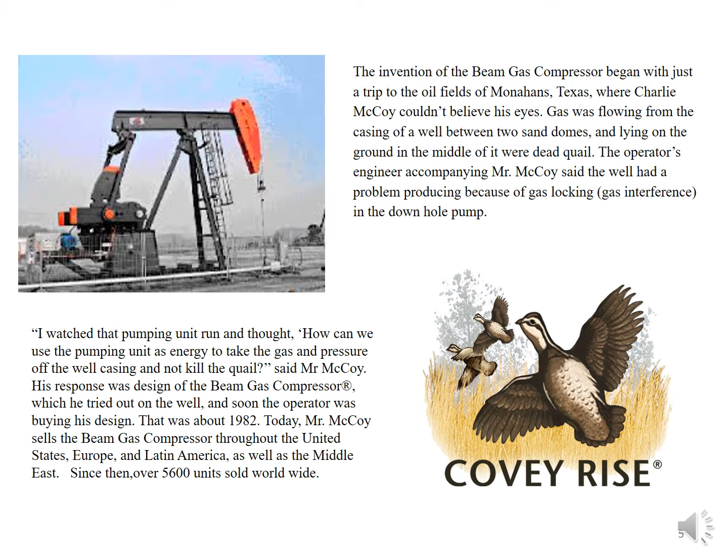But unfortunately for this covey of quail, they happened to be running past at the same time he blew it down, and killed the birds. My boss at that time, and still to this day, is a big birder. So from a conservation standpoint, he wanted to know: how can I blow down that well in an environmentally friendly way and not kill the quail?

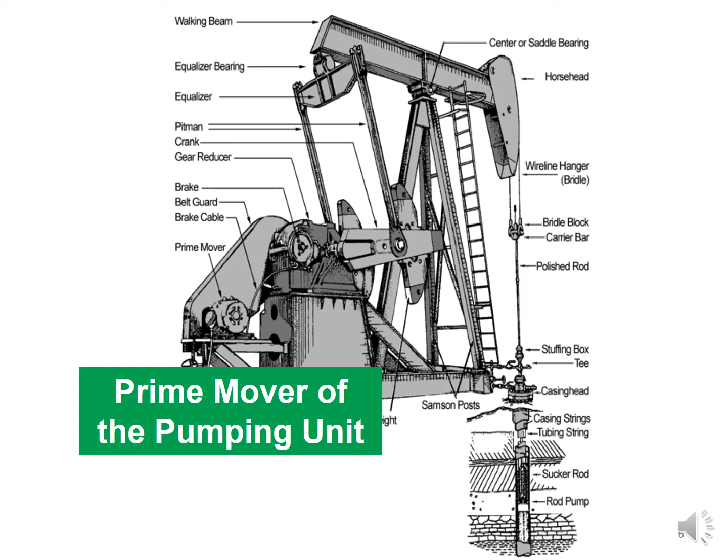That's how he came up with the HyBGC compressor, which has been our main product, because he saw that he had this big pumping unit that just goes up and down and hardly needs service, and just operates and runs. He figured out that he could put a cylinder inside of that structure. How many of you have ever heard of Arm & Hammer?

Arm & Hammer for decades had one product. Then all of a sudden somebody accidentally left it in the refrigerator, and now they had two products. And that's just how it emerged.

In the 80s, you could not find a brand new pumping unit, because there was an oil rush going on, and there weren't enough pumping units, because Lufkin was pretty much the only choice. So if you had a 640 pumping unit on a well making 5 or 6 barrels a day, and you just drilled a well over here that needed a pumping unit for 50 or 60 barrels a day, you were screwed. So what Charlie did was create a pneumatic lift system where he simply put a cylinder over the top of the wellhead, added a piston rod onto your rod string, and then stroked that rod pneumatically. That allowed the operator to take that 640 pumping unit and put it somewhere else.

So he already had the basic idea that if he just took that pneumatic cylinder and put it inside the structure of the pumping unit, now the pumping unit can give him all the action as it's pulling this piston up and down. And these systems are all over the world.

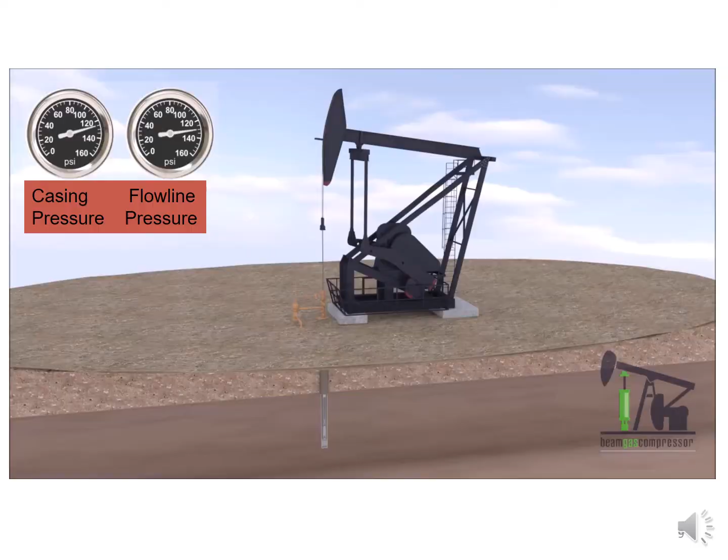This is an example of how we work. We're all about, once again, pressure. Bottom hole pressure is made up of what? Casing pressure and your hydrostatic head. So to lower bottom hole pressure, the simplest thing to do is get rid of the casing pressure. And that's what we do with our systems.

So if you had a typical vertical or horizontal well, the main thing you want is as much fluid in your pump as possible. But what causes you problems? Gas pressure.

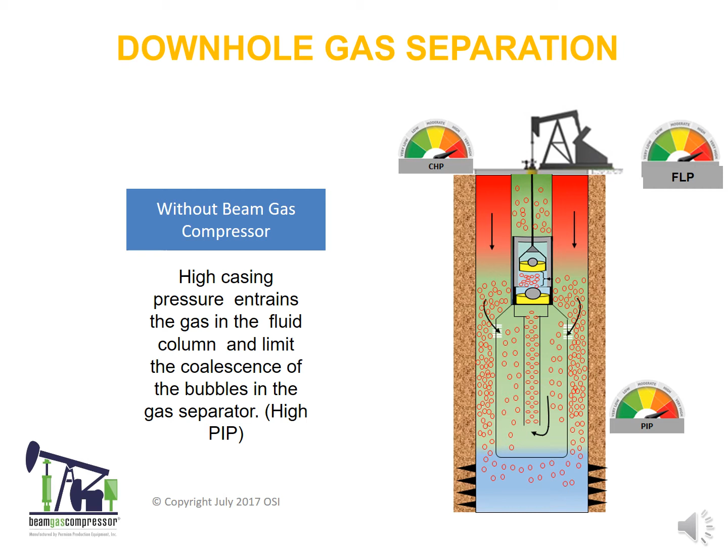Either the gas, because you have high casing pressure, will go into the pump, or it'll just be in the place where you don't want it to be, and it affects your operation. But if you go and get rid of that casing pressure by installing a beam gas compressor, you can drop your suction pressure and discharge into the flow line as you were before.

But now you're giving the casing gas a different place to go because you've taken it off the well. Now the gas is going to go up the annulus, and as the gas goes up the annulus, I don't think any of you have ever opened a beer.

When you take that bottle of beer and take the top off, instantly foam is created. As the gas bubbles go through the fluid, they create foam. But if you just let that bottle sit there, gas bubbles will continually go through the fluid, and it lets that fluid be less dense. Because if you just had the bottle with the cap on, the density of that fluid is much more than with the cap off.

Same thing for an oil well. So if you're trying to lower bottom hole pressure by getting rid of casing pressure, you also create less dense fluid. Most horizontal wells you normally run with 1,500 to 2,000 feet of fluid over the pump because you can't pump it down, the gas goes in your pump, unless you go get an Odessa separator, a HEAL system, or a Predator or something to try to keep the gas from going into the pump.

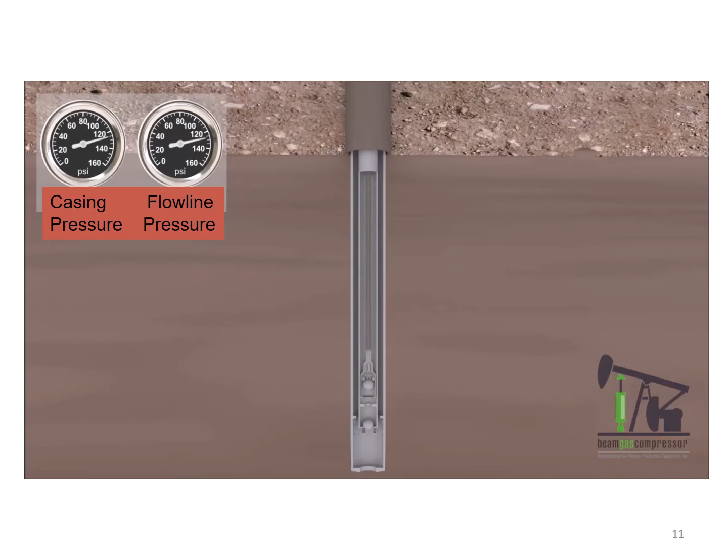What we suggest is let's get rid of the casing pressure first before you go and do something downhole, because it's a whole lot cheaper to work on something on the surface. A lot of people already have a Mother Hubbard below the pump. If we take the casing pressure off, we're going to give you more fluid because we're giving you a lower bottom hole pressure.

Now, the only problem you run into with horizontal wells - we did this for Oxy 5 years ago. We put 3 compressors on some wells they had in Carlsbad, and at that time they were running 90-foot tailpipes. All we did was make their gas interference worse, because once we took the casing pressure off, the gas wants to move faster to the wellbore, to the vertical side.

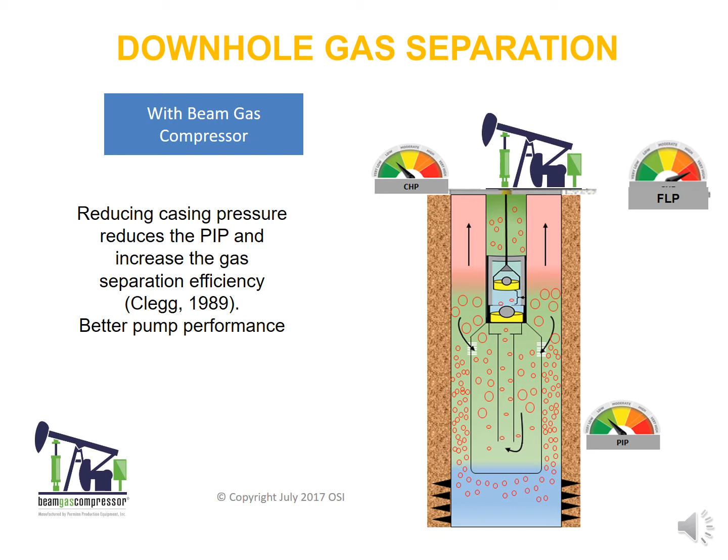And when that pumping unit stroked up, it just created a greater differential and maybe just sucked more gas up that tailpipe. I'm sure you've all heard of water getting sucked up the tailpipe - same thing happens with gas when it goes up that way. And this is the reason.

What we get into with gas and fluid is this - these are your gas bubbles when they're entrained in the fluid. They're small. But as soon as we lower the casing pressure above it, we're going to make those bubbles get larger and they're going to move at a faster velocity.

One of the big deals with horizontal wells used to be up in the Bakken was that they'd foam - they'd produce fluid up the backside. Well, I can take a well that's got 600 pounds of bottom hole pressure, and as soon as I take the casing pressure off of it, it's going to foam. Because even if it's 7,000 to 8,000 feet deep, when I take that gas off there, I'm going to push that fluid to the surface, and it's going to come right up along the casing in the annulus.

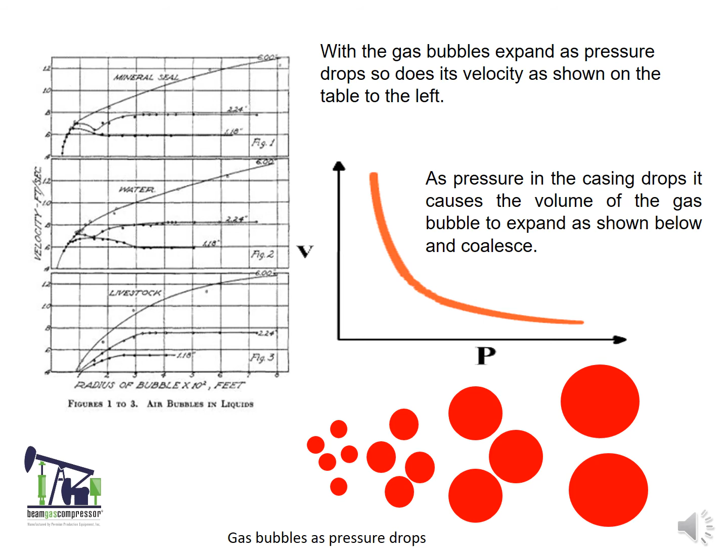And my compressor doesn't really like that, because our beam gas compressors were designed to have relatively dry gas. We can have high BTU gas, but if you send me a slug of fluid, I'm not going to like that. On a horizontal well, you already have a tendency to foam because you have this long corridor of fluid and gas constantly going through it. It just keeps getting agitated.

That's all that's going on. It's not really because the fluid wants to foam, it's just because you've got so much of it and gas rushing through it, so it's going to foam. So when we take the casing pressure off, we're going to make that even worse unless we figure out how to stop that.

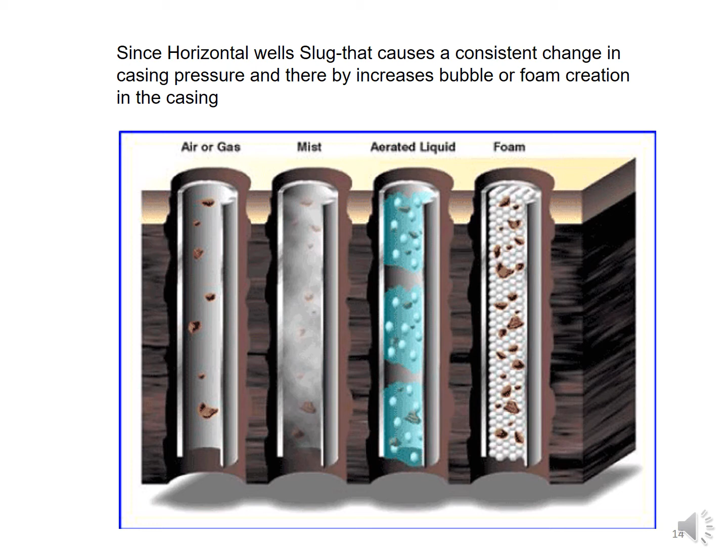So this is a well for EOG up in North Dakota. They had a horizontal well making about 150 MCF of gas. So what they did was hook the beam gas compressor to discharge the gas back in on this side. The operator took this video, but he started backwards and started at the back end.

And then we get over here - here's the line going up to the beam gas compressor. They're non-lubricated, so pretty much they just sit there and run. There's not a whole lot to mess with on them. And then you come down here, here's the suction side. That's my boss there standing in the way of the filming.

And so here's the suction line where we suck the gas off of that line. Because it's a horizontal well and they had 750, 800 pounds of bottom hole pressure, we had them put a vessel over here on the side so it would capture any fluid that came up. The cost for us doing this is about $25,000. And the vessel, they just have one out in their yard.

So here, we can lower casing pressure very well on a horizontal well as long as we got some way to keep the fluid from when it comes to surface so we can stop it. But that gets to be problematic. And the reason why it sort of gets problematic is Chevron has a steam flood that they operate out in Bakersfield, about 6 years ago. Is everybody familiar how a steam flood works?

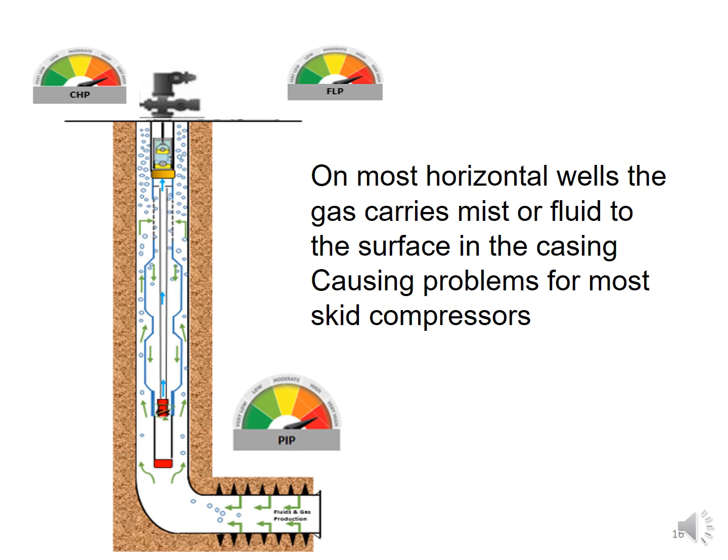So what we started looking at, okay, now here you have a horizontal well. This has an Odessa separator in it. And this is, they've got casing pressure, they got flow line pressure, they got bottom hole pressure, their pump intake pressure. But as soon as we take that pressure off, we're going to make everything work better because we get more pumping pressure, but we also start slugging that well a little bit more.

So what we designed was a hydraulic system to go on top of the wellhead instead of going on the pumping unit. And the hydraulic system, and you'll see here later, is really slick because we don't care if I get straight fluid, straight gas, or a mixture, because I can move it. Typically all I'm trying to do is move it from off the annulus and back into the wellhead so that this horizontal well can continue to produce.

Now, we talked about pressure. How many of you guys run ESPs? What's the worst thing in the world to happen with an ESP? Casing pressure go from 100 pounds to 200 pounds, 100 pounds to 20 pounds. They don't like that.

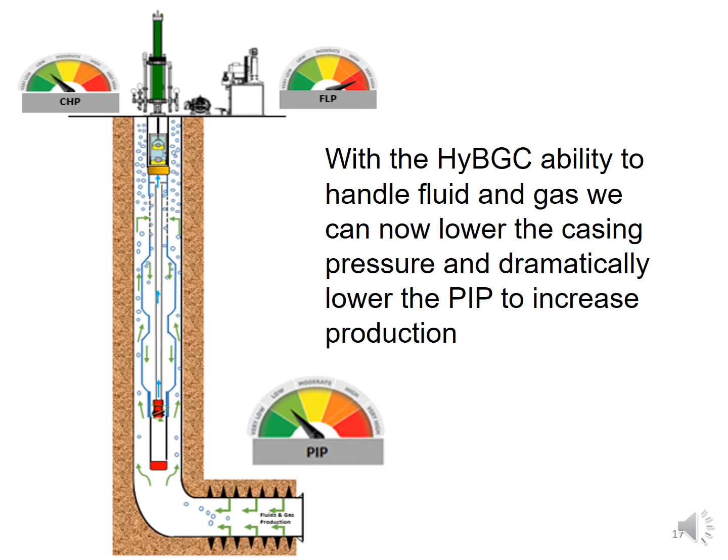Most wells don't. And if you put a typical skid compressor on the surface on an ESP and you pull the backside on, you're going to do real well for a period of time until the scrubber tank fills up. And then that scrubber tank, once it fills up, it's going to do something. If it's through automation, it might have to pump all that fluid out, but more often than not, it shuts down. And when it shuts down, your casing pressure goes back up. So that's really not a good thing to your ESP or your downhole equipment.

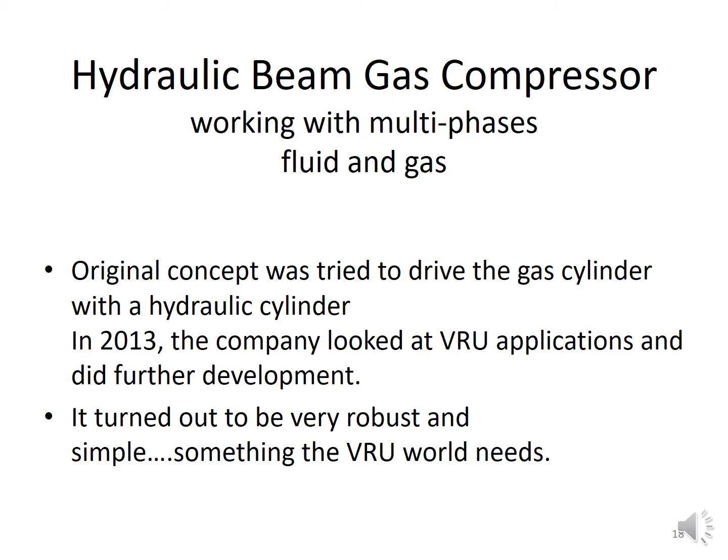So what we started doing actually about 15 years ago was developing a method that we could drive our beam compressor that's been around for 40 years with a system that's been around for 100 years. This hydraulics has been around forever.

The one thing you don't see in here is the mechanic that comes along with this. The statistic I've always heard is that when you run these types of things, you need one mechanic for about every 6 or 7 units, because they're constantly having problems and fouling, and they normally run anywhere from 94 to 96% of the year. For the last 6 years that we've been operating our system, we've been running at 99.9%. The only time we're ever down is when the automation messes up, more often than not.

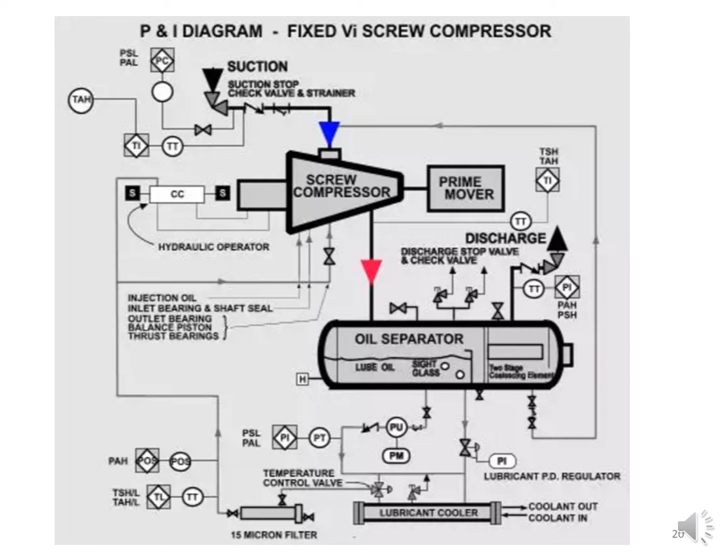This is the difference - these are all the different things we don't have to have compared to our competitor. The thing I think the most about this is that we're very simple. I like to consider myself simple-minded, and simple is a whole lot easier. With this type of system, you don't need one mechanic for every 6 units. You can have one mechanic for hundreds, because the amount of problems you're going to have are yearly, not weekly or month by month.

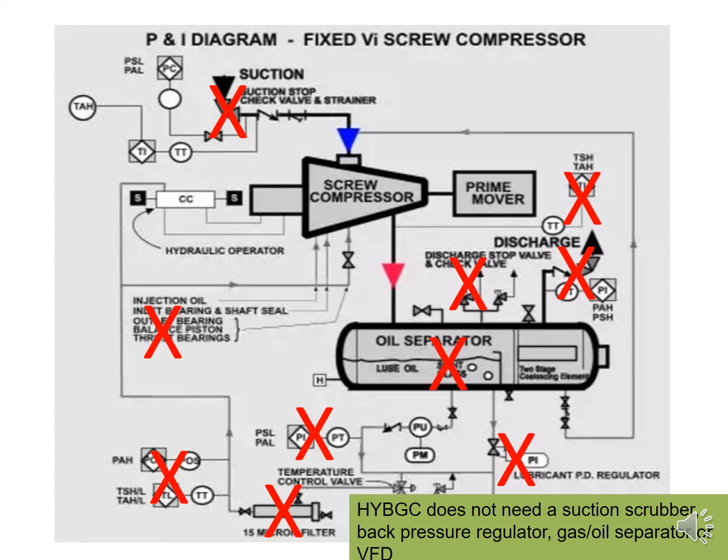Because if I see gas and fluid come into the bottom here and my piston's trying to go down, my system just reads that as hydraulic pressure. We just push until we get whatever maximum number we want, and then we change direction. So we might short stroke for a period of time until we push all the fluid out. We might raise the casing pressure - instead of it being at 5, it might go to 7 or 10 until we get all the fluid out. But we don't have to worry about it.

One of the big applications for horizontal wells - I don't think I've seen it too much in the Permian - is allocation separators. When you have 6, 7, 8, 10 well pads, normally the Railroad Commission likes to know how much each well is making. So the solution has normally been that you take this big allocation separator, set it on your big pad, and drive all your fluid into there so you can measure everything going to that allocation separator. Then the allocation separator has to build pressure to send that fluid to a battery.

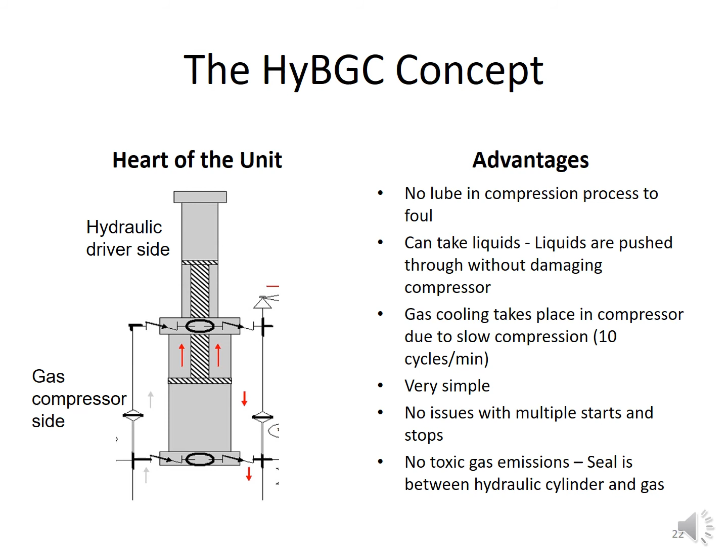As soon as you build pressure in that allocation separator, what are you doing to all your well bores? You're building pressure. So by putting my system on the outside of that allocation separator, I can lower the pressure in the allocation separator to 15 pounds, whatever it takes to dump, and I can lower the pressure to all of the wells in the pad. Then I can compress the gas back in the flow line and use that to push back up to 200 or 250 pounds to push all the fluid to where you're trying to get it to. With one simple thing, I can increase production on a large number of wells.

So this is what happens - how many are familiar with hydraulics? Hydraulics, you see it all the time on the garbage truck. You see all these devices that have these rams and stuff, and they just work. There's just not much to them.

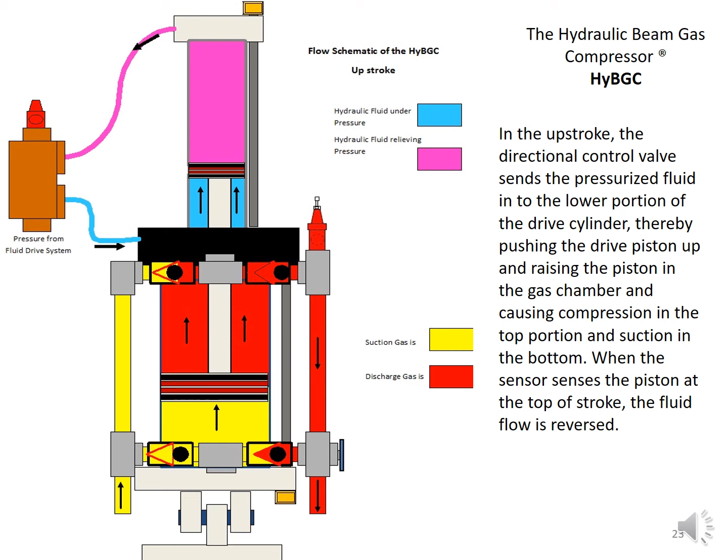The heart of it is the directional valve, which is basically a valve that either goes this way or it goes this way. If it goes this way, it's sending fluid to the bottom of my device. If it goes this way, it's sending fluid to the top of my device. So depending on which way it's going, that determines which way this is going. Right now it's going up.

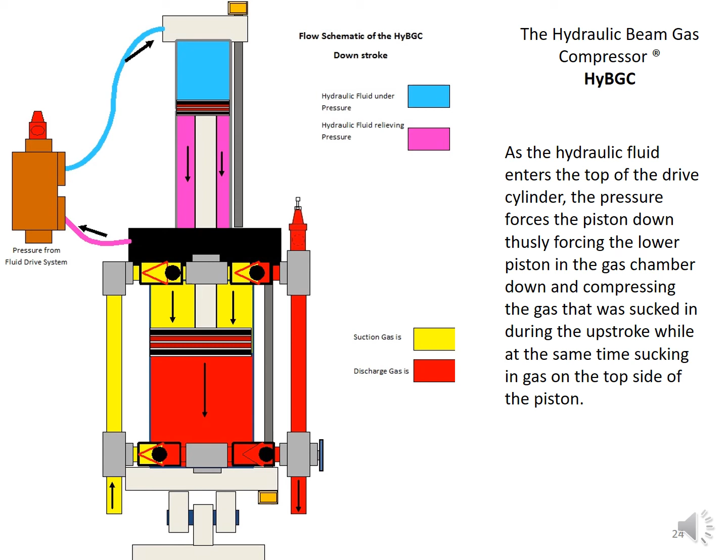And now it's going down. That's the action of the system. There's really nothing more complicated than what I've just shown you. It has 4 check valves. It has a pressure release valve on it.

But one of the interesting things about it is we're dual acting, just like our beam gas compressors were. We compress up and down. But if we get fluid in it, what happens?

All we do is just keep on running. So we're sucking straight fluid. We've had customers buy them, like in Alaska, just to move fluid off of a Rotaflex. It's not going to bother our system because we design it to run with the fluid. We don't need to scrub it out. We don't need to have dry gas going into the compressor. None of that's worrisome to us.

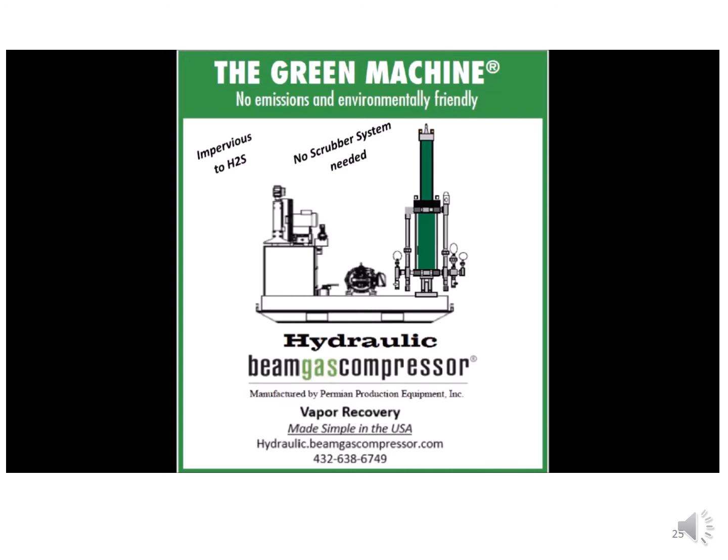So typically our beam gas or hydraulic compressors will have a suction side, and we'll put a pressure gauge, pressure transmitter on this side, and discharge transmitter, temperature, and this is the guy that controls what we do.

Because inside the structure of the hydraulic system, we have a proportional valve, that directional valve I showed you. How much the valve goes left or right depends on the suction pressure, how fast I want it to go. You guys are typically used to variable frequency drives, but most people don't like VFDs because they're a pain in the ass. They're very persnickety.

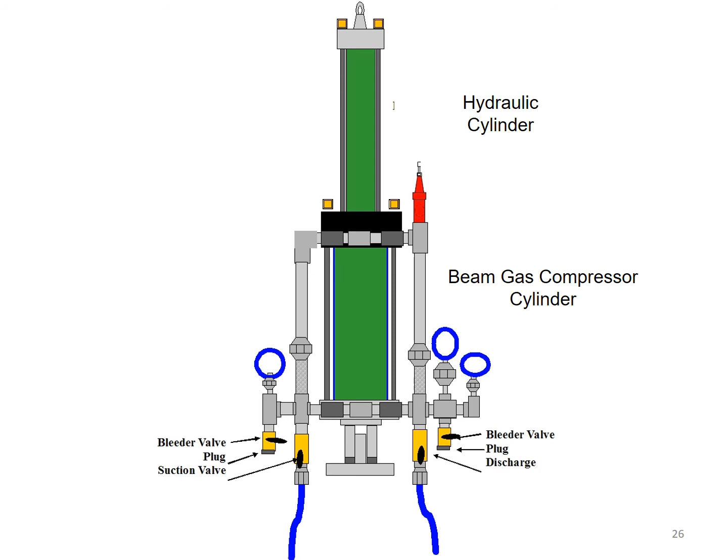Well, here we can take a proportional valve, and depending on whatever kind of programming you have, we tell that valve — it's a 4 to 20 milliamp signal. Depending on how far you want it open, that tells the valve how much fluid to send to the system. Sends more fluid, I go up and down faster. If I don't need to go that fast, it sends less fluid and I just go slower. But I don't require anything super special like a VFD to accomplish that.

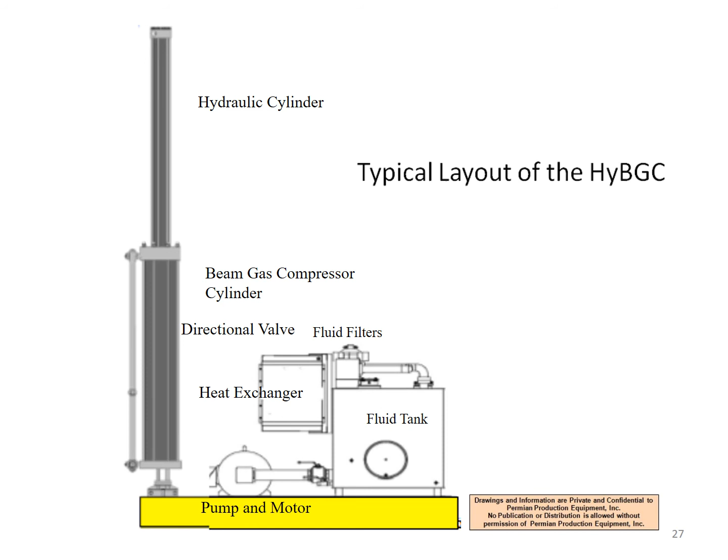The control system for this is whatever you want to put on. We do not provide you a control system because you already have people trained for that or used to that. We can use a Lufkin SAM unit, or whatever they call it nowadays, Well control, Allen Bradley — like anything that can give me 5 analog ports that I can plug a transmitter to, and I can tell a motor to come on. We've done it with Murphy switches. It's just to make it really, really simple.

Since then, they figured out that on their batteries, they normally already have a system they can just add another card to, the system that's already running all their other stuff, and we can piggyback on top of that. We don't have to have a separate system.

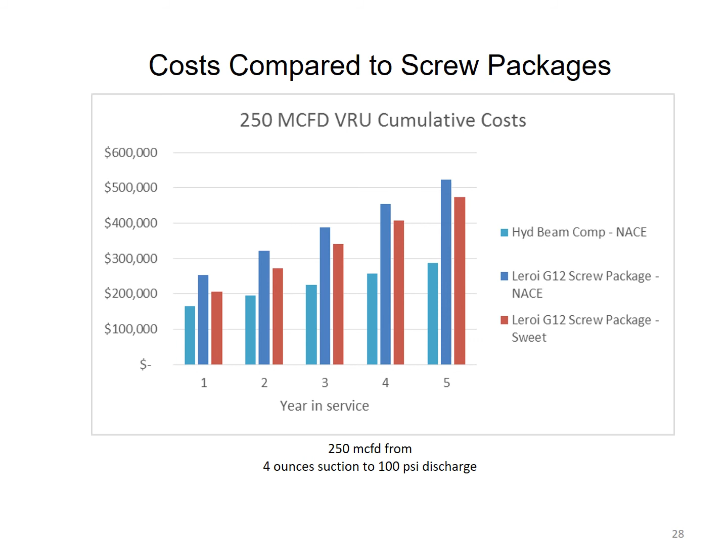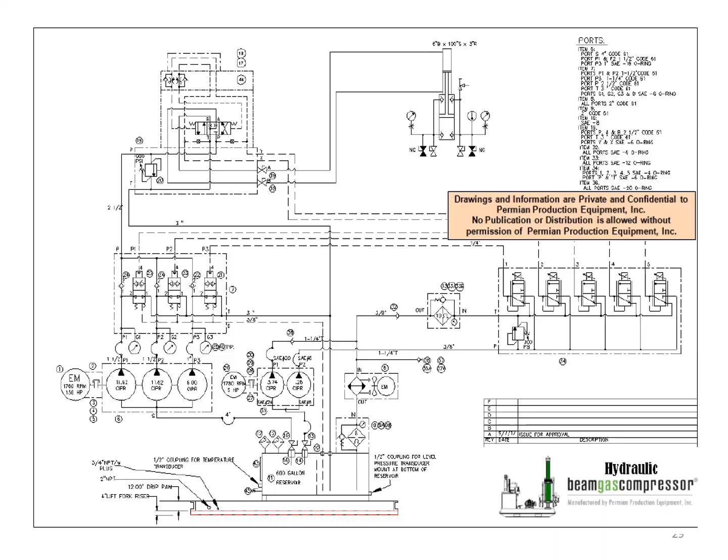Fluid goes over here, these are the proportional valves. Fluid goes here into this and tells how much fluid, and comes to our compressor and comes back. But if you looked at a P&ID for a screw compressor doing the same thing, I don't think you could fit it on one page — I think it'd be multiple pages. So there's a bunch of different advantages to our system. I like no VFD.

All of our systems are basically H2S compliant, regardless of what you're looking at. You know, NACE compliance to us, we're really already there. There's nothing that we change to get to be NACE compliant. Everything's stainless steel already, 3,000 pounds, so there's nothing we really have to change that's wetted by gas that has to be NACE. Whereas other compressors, they have a lot of components that they have to change out.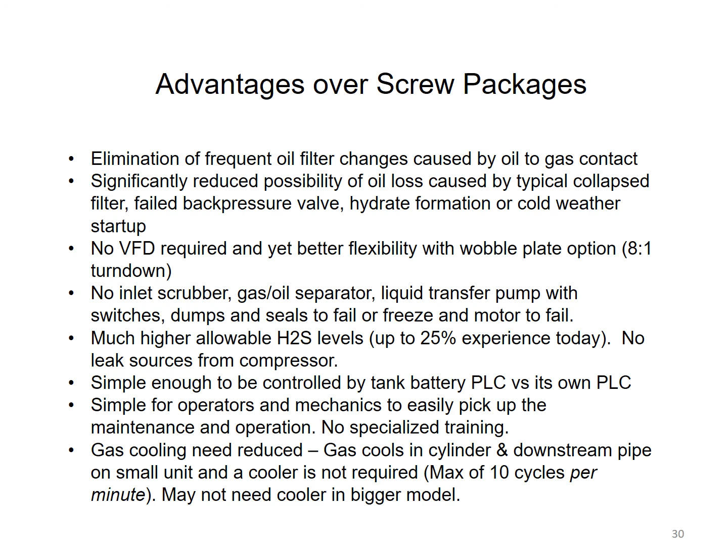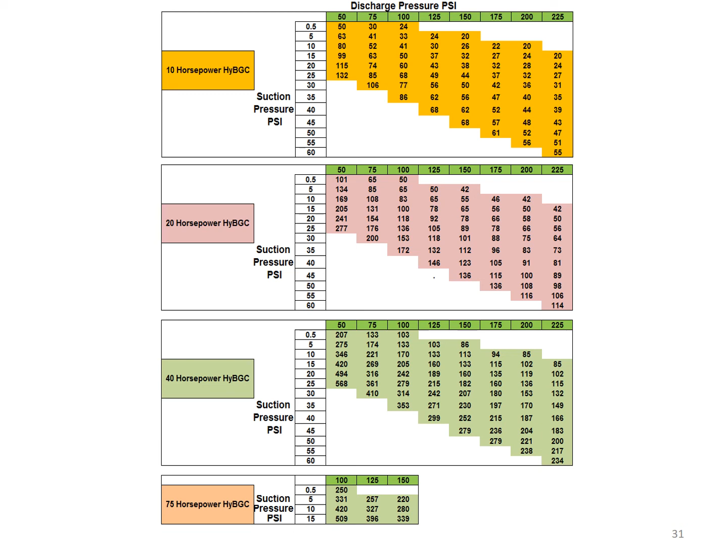These are typical pressures. We can run them with a 10 horsepower motor, 20, 40, 75. We've got ones in the yard now at 150, 200 horsepower. We can do pretty much anything that you ever need. What we're looking for is what kind of discharge pressure am I pushing into, and how low do you want me to go on the suction side in gas, and then I can tell you how big of a motor I need and how much fluid I need to drive. It's a fairly simple concept.

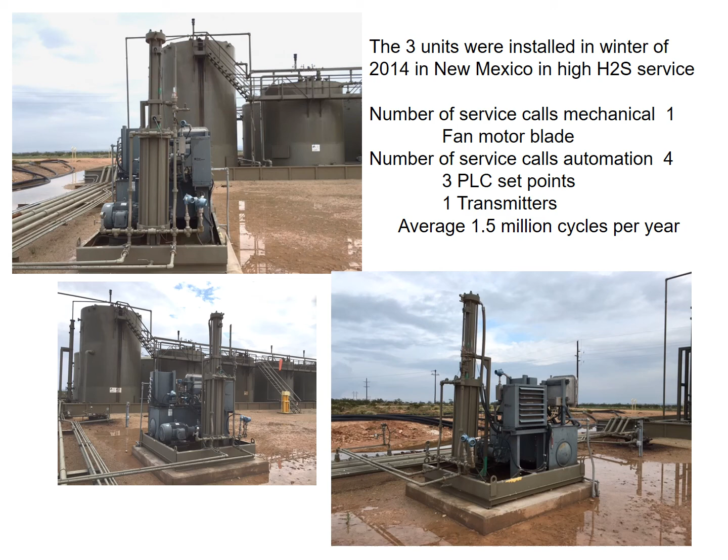These are some different wells that we've got it on. It rained in New Mexico this day, last year I guess sometime. It's just a vapor recovery unit, they just plumb it in and it just sort of sits there. Now this operator, this is the Allen Bradley panel that they have put on there, but they don't put it on there anymore, because when they were first doing this, they put it on the skid, and they had to have a Div 1 explosion-proof panel and stuff, and that was just ridiculous.

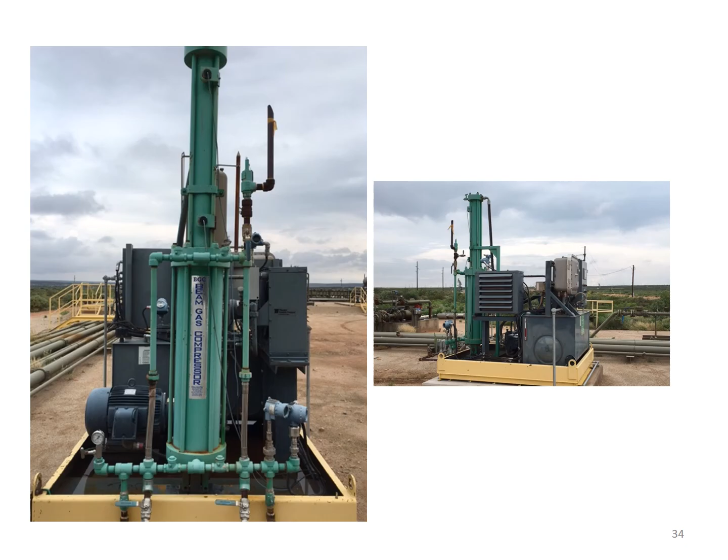There's another one, this is one out here in Odessa. This is one out in Andrews. This was interesting because...

One of the things that happens with gas when you compress it is it gets hot. Most skid compressors run at 3 to 4 ratios of compression, and the reason why is because if they ran faster than that, they'd get too hot. Well, we run at 9 ratios of compression. Hot is not an issue to us. Now, my system runs at 5 to 9 cycles a minute. A skid compressor runs at 1,500 cycles a minute.

And you've got something going back and forth that fast, it's going to get hot. With my system, every time I stroke up, I'm drawing cooler gas into the cylinder. Then when I push down, I heat up the cylinder for a split second, but then I'm pulling cool gas back into it. Because there's large volumes of gas, and because I'm running at 9 cycles as opposed to 1,500, I don't have the problem with heating the gas up.

So what happens when you heat up gas in West Texas? As soon as it hits the sales line, it cools off. And as soon as it cools off, if it's got any BTU in there, it's going to form condensate. Now you're pushing condensate to your gas plant, and they sort of don't like that. So with our compressor, because we're not going to heat up the gas, we're not going to allow the BTUs to drop out. We just push the gas down, and we don't have any issues with that.

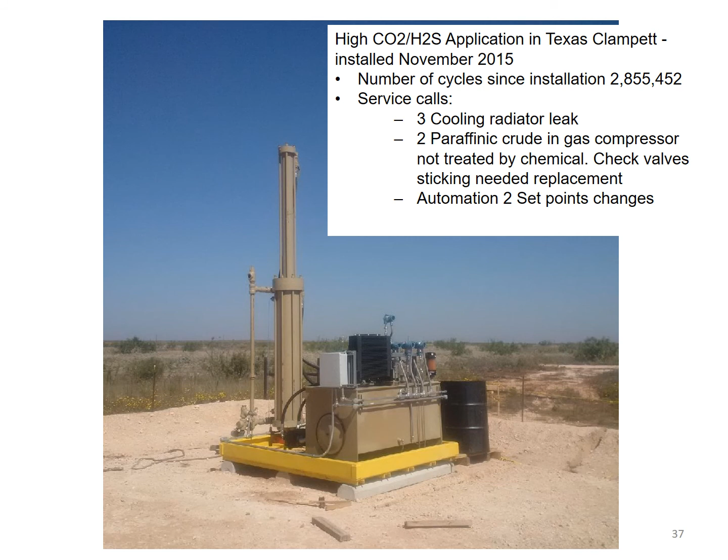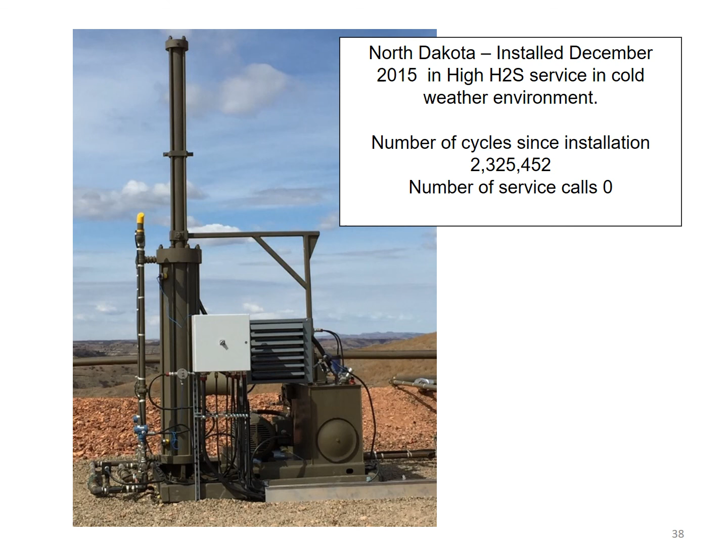It's been working, I guess, since when did we put it in - 2015, so it's still operational. And they have yet to pick up the phone and say, Mark, it broke. Because there's just nothing to break, there's just not that much in it.

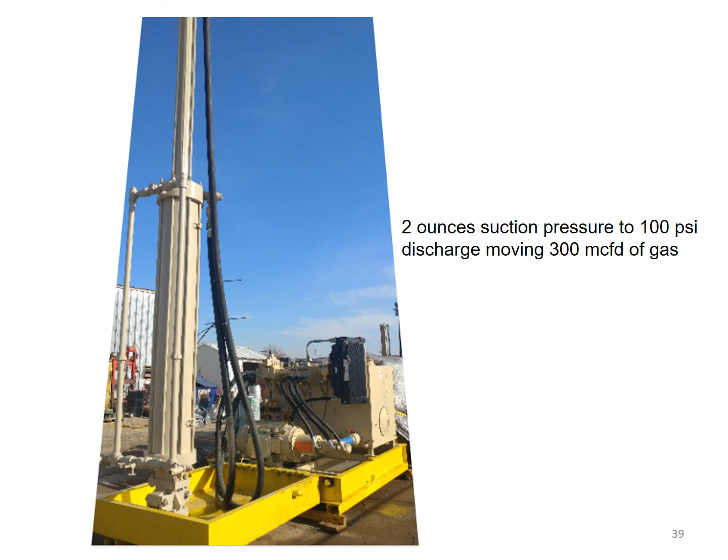This is one of our larger systems where we have a 150 horsepower motor. This is a triple vane pump. And this compressor is 100 inches tall, which makes this 100 inches tall, which means this whole thing is real tall. But real tall is okay on most oil pads, tall is not that big of a deal. And we put it in multiple pans as far as depending on how much fluid we're going to have, so we have a capacity to hold fluid if in the worst case scenario we get a leak.

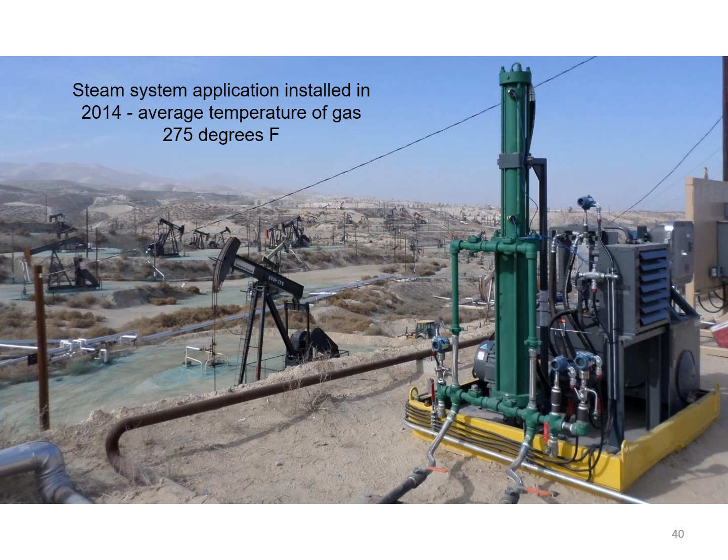This is the well we do for Chevron, out in Bakersfield. They put a unit here so they can take gas off of five different wells as they steam them up.

Many of you have heard the term blow-by. On a skid compressor, blow-by is a big deal with the EPA, because if you have that piston pushing and compressing gas, gas will seep around the piston seal and go out to atmosphere. It's just going to happen, you're not going to be able to stop it all. So a lot of compressor systems put a different exhaust setup on here so they can capture that and resend it in if they're gas fired, so they can reburn it, or they have to do a lot of extra stuff for that.

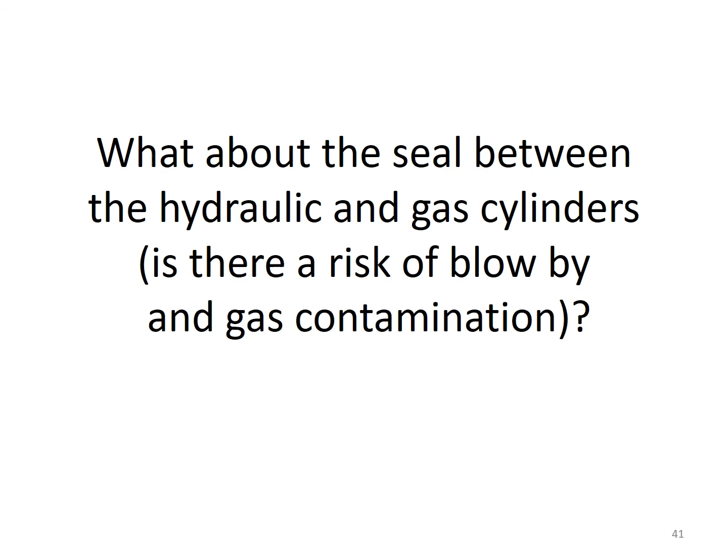I don't worry about it, and the reason is we have a triple redundant seal in our middle head.

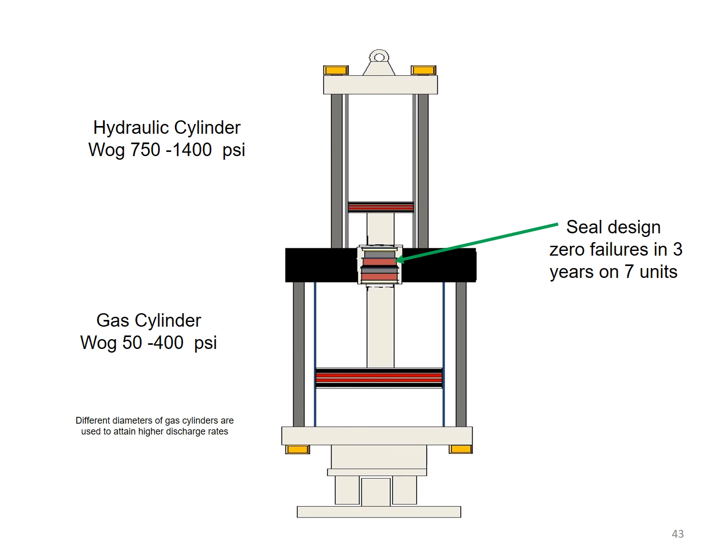So this is where our middle head is. The hydraulic cylinder runs at 750 to 1400 pounds of pressure, so it's pushing down pretty hard. The gas side will barely ever get over 400, so our seal is constantly closed, and gas can't escape this way. From the point where the gas comes in and the gas leaves, there's really nowhere for the gas to ever escape our compressor. If the EPA came by with one of their FLIR cameras, they're not going to see any gas escaping from my stuff. Your stuff, I'm not going to say nothing about. But my stuff, I'm not worried about.

So we got it on service. This is the deal in California where they had multiple wells they were steaming, and they hooked up multiple units so they can pull it off of multiple wells. In some of the steam floods, they'll steam them for a longer period of time, so they just mount them on a trailer so they can haul it around. Once they pull that 100 pounds of pressure off the well, it's not going to get any more pressure because it's dead oil, so it doesn't have to sit there full time. It just needs to be there long enough to pull the pressure off after they've released the gas.

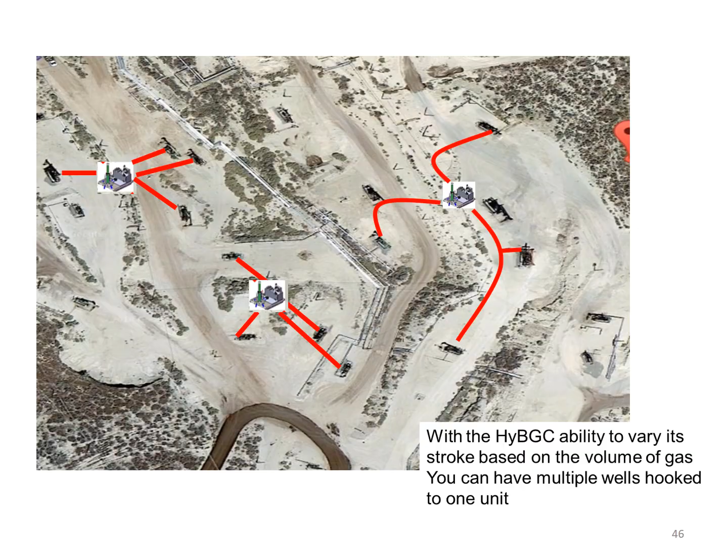ESPs - I think on an ESP this system works remarkably well. We've done a few, but most have been in the Middle East. How many of you ever designed an ESP? Don't you design it for gas interference? Why? Because you don't have a way to get rid of the gas. So if I have a way to get rid of the casing pressure in the annulus, the odds are the gas interference in your ESP is going to be considerably less. If I have less casing pressure, I'm going to have lower bottom hole pressure, so it's going to make your ESP run more efficiently, and it's going to allow you to have greater pump fillage on that ESP with less hertz to do the same work. And if an ESP uses less hertz, I'd think it works for a little while longer.

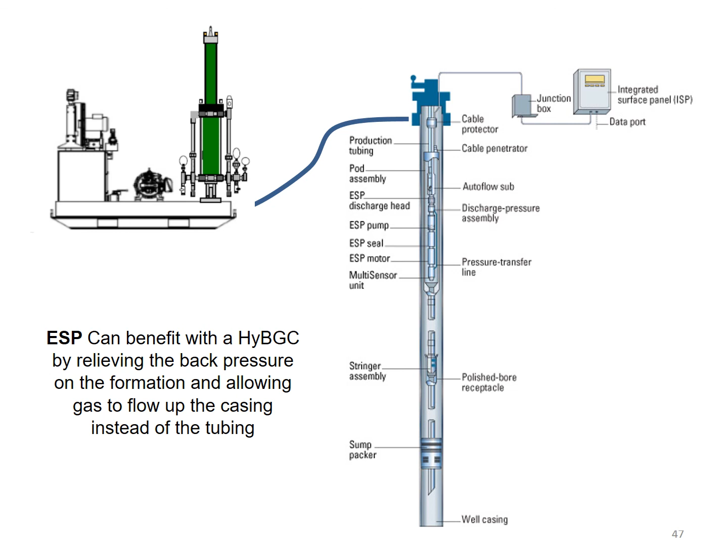In Mississippi, we did this one time where the guy had all of his wells run on propane. They had a central place where they pumped all the propane to those locations, but the problem was in the winter those propane lines would get cold and the propane would drop a lot of fluid out, and then the fluid would freeze. They just ran into a lot of problems. So here, because I can run wet or dry, I can push everything and we could keep it constantly running.

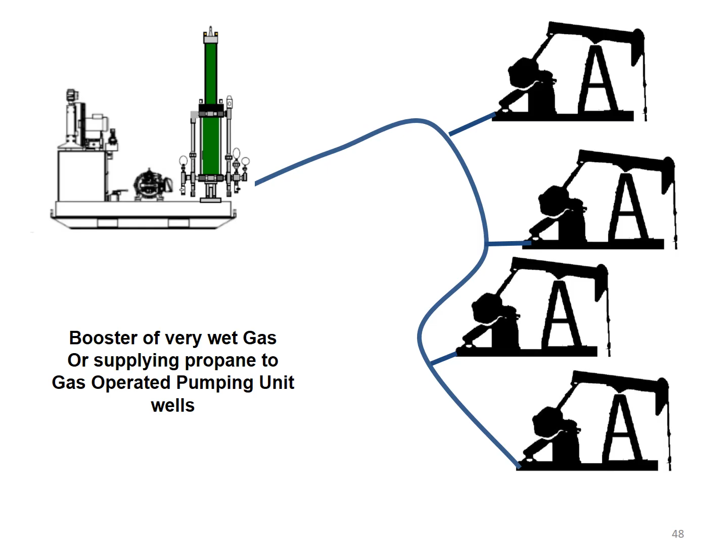It's an interesting system.

We had in Colombia, we do all the work for Ecopetrol, and they were looking at setting a really large compressor for $4.5 million to move a million cubic feet of gas a day - maybe that's the wrong number. But we just went and put 20 of our units in there, manifolded together. Our cost was a third of what the one compressor was. But we also showed them that because we had an extra unit in our 20 - we only had 19 run at any time - if any of them needed to be serviced, we just turn on that 20th one. So instead of having 99.9% runtime with our system, they've got 100% runtime because they've got a constant backup. Whereas with the other one, when their one big compressor went down, they would lose a lot of production. And obviously it's going to go down because you have to maintain it, not to say whether it just actually breaks.